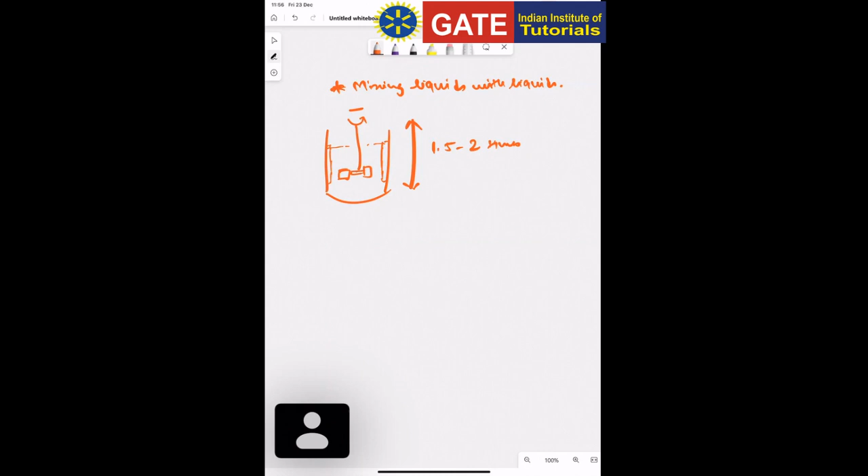In such equipment, the usual configuration you want is that the height of the vessel would be somewhere in the range of 1.5 to 2 times the diameter. So this is the diameter of the vessel, and the diameter of the impeller we are using is approximately 1/3 of the diameter of your vessel.

This agitator or impeller is usually driven by an electric motor. This vessel, depending on whether you are trying to do a batch or a continuous reaction, if it is a continuous one, will have a provision for an inlet and an outlet, and then a heating coil or jacket in case the stirring or mixing needs to be done at a certain elevated temperature.

We know that in most cases, when two materials are in contact with each other, they have a certain tendency of getting mixed. As you increase the temperature, the solubility or miscibility would increase. So in cases where you need a very concentrated solution, you will have to provide certain heating, which could be provided through a heating jacket around this vessel.

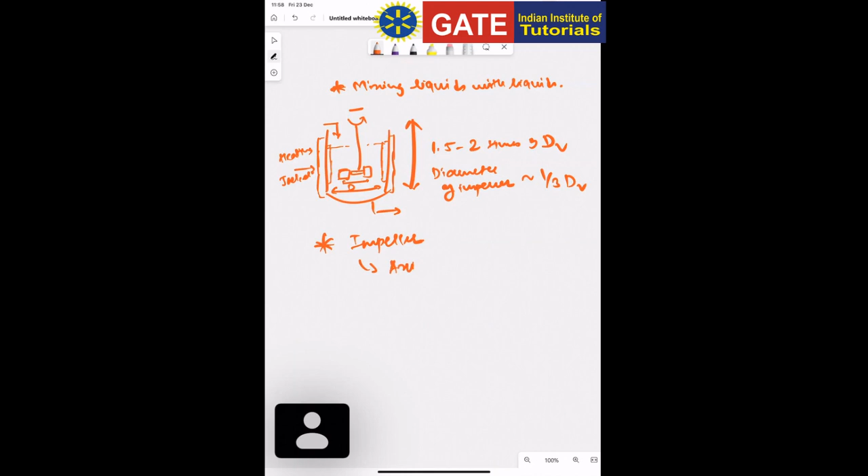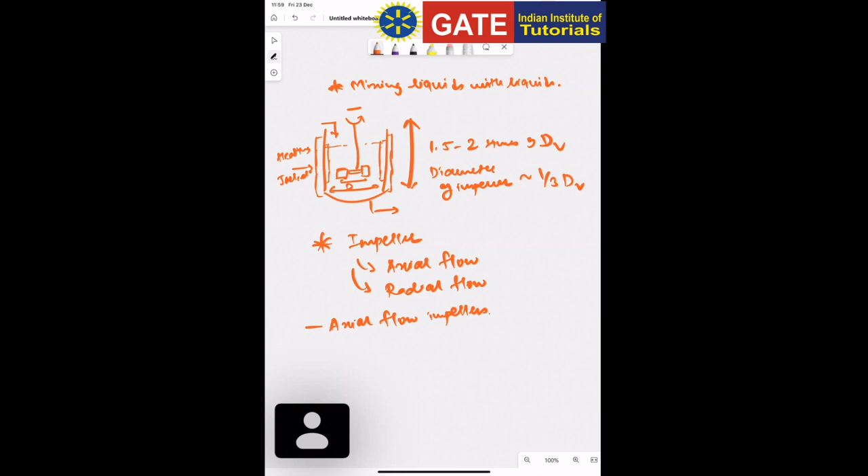One is your axial flow impellers, and the second one is your radial flow impeller. The basic difference between axial flow and radial flow impeller is that the axial flow impellers generate the flow currents or flow patterns which go parallel to the axis of the shaft.

So in axial flow impellers, the flow currents are parallel to the axis of shaft, and hence the name axial flow. And in radial flow, they generate flow currents in the tangential or radial directions.

When you have motion of liquid, let's say your shaft is moving in this direction, so your radial flow will be something like this. Because of the circular motion generated here, along with the tangential flow due to the circular motion induced by these impellers, these kinds of flow currents would be generated by your radial flow impellers.

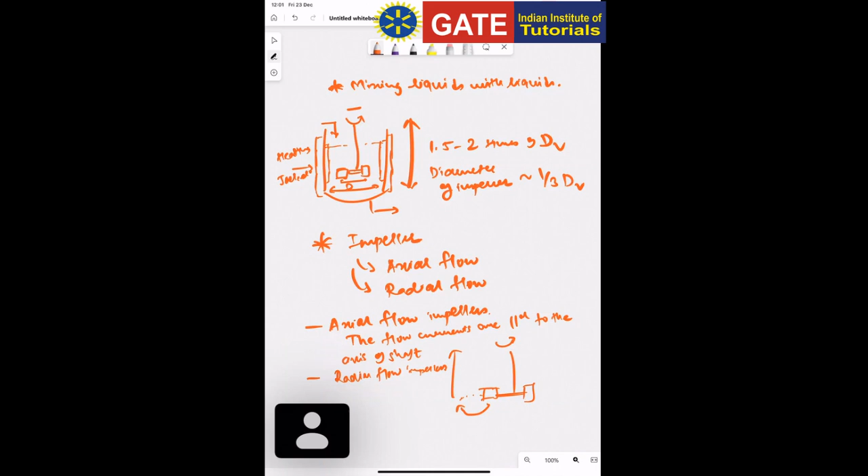Further, depending on the configuration of the blades or the impeller dimensions, you have more varieties based on which it can be classified, which includes propellers, second is paddles, and the third one is turbine. These three are based on nothing but the configuration or design of your impeller.

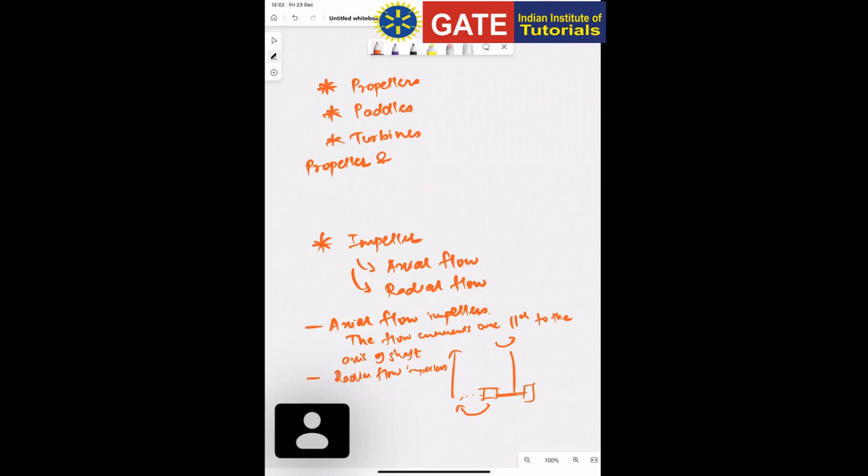The first two, axial flow and radial flow, are classified based on the flow currents or direction of flow currents generated by them. Based on the two different classification methods we discussed, your propeller and pitched blade turbines,

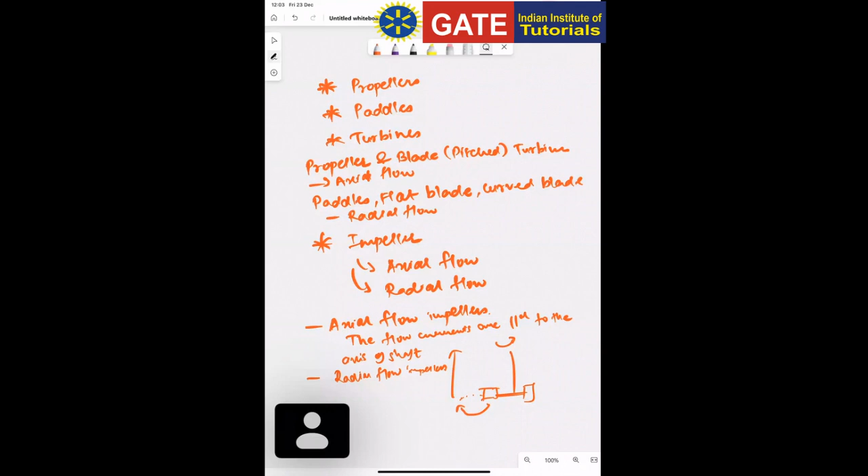they are axial flow impellers, whereas your paddles, flat blade and curved blade, these are your radial flow impellers. I've just mentioned the names here, I'll show you in general how they actually look like.

First let's see how the propeller is. The most common one, and the one you must have seen very often, is the three blade propeller. It's something like this - you have your three blade propeller, and this is the point where it is connected to the shaft.

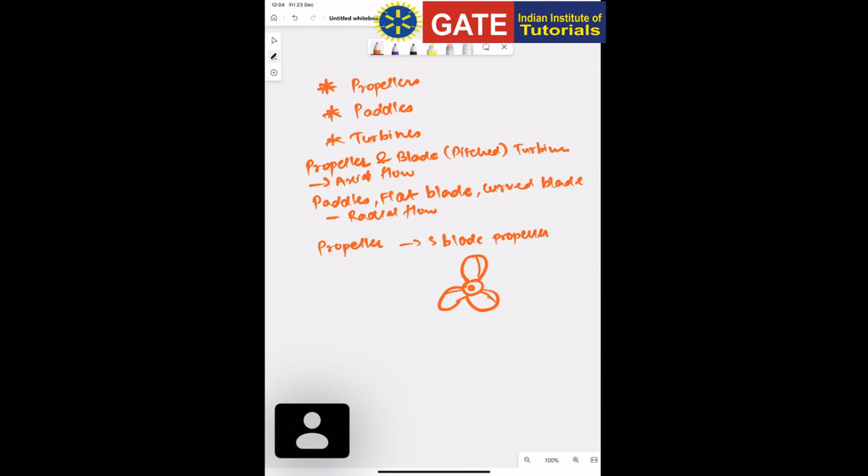Most of the time it is something we must have seen in any of our lab experiments where we have a batch reactor and you have to provide a very high speed stirring. So in those cases, these propellers are used. This is the three blade propeller, and these are typically the high speed ones.

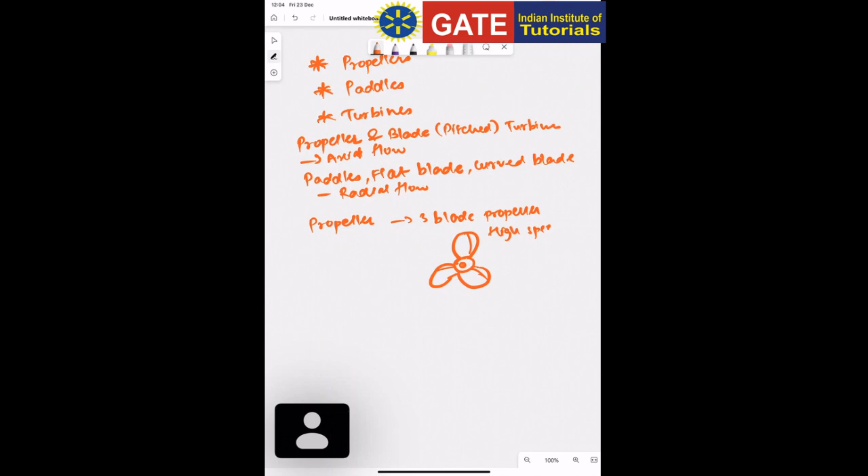In case where you have a very large vessel, it's possible to use such high speed propellers for mixing, and they would be sufficient enough to not cause any localized spots where you have only certain concentrations at one point and a different concentration at another. If you have a very large size, there are different ways in which you can use this propeller - one is the vertical alignment, and the other is the sideways alignment, where you can have your propeller aligned through one of the sides of the vessel.

This one is what we call the centrally mounted propeller. This one is your sidewall mounted. And then there is also the possibility that instead of having it perpendicular to the surface of the liquid, you can also align it in a different direction, something like this.

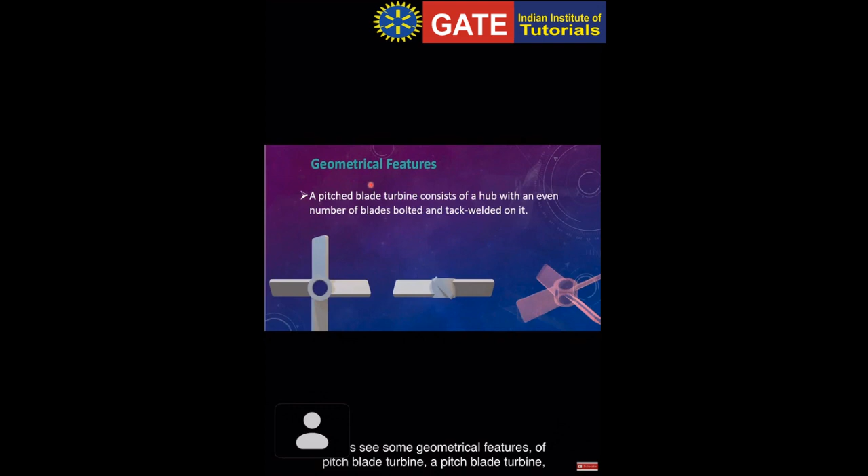That is how your pitch blade turbine looks like, and compared to the straight open blade and the vertical curved blade, it obviously has a slightly different configuration. So these are the types of turbines. Let's now look at the specifications of the ones which are generally used. The ones most commonly used among the turbines, as I mentioned, include the vertical curved blade and the open straight blade, and these are the ones which have more effect towards generating radial flow currents than axial flow.

So we were discussing about turbines, and the commonly used turbines are effective to develop radial currents.

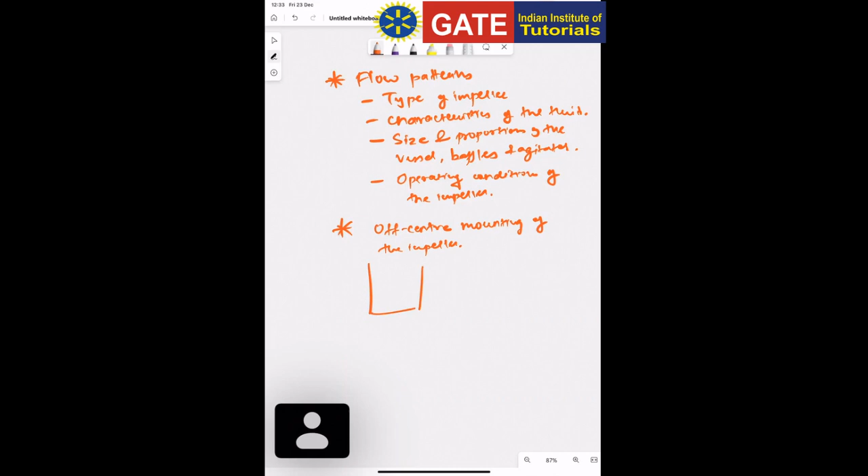Another way in which you can avoid formation of vortex, which we discussed briefly, is off-center mounting of the impeller. This off-center mounting is as opposed to something centrally mounted. Off-center is something where it is not exactly at the center of the geometry of the vessel, but somewhere on the sides, or at a certain angle, or on the sides of it.

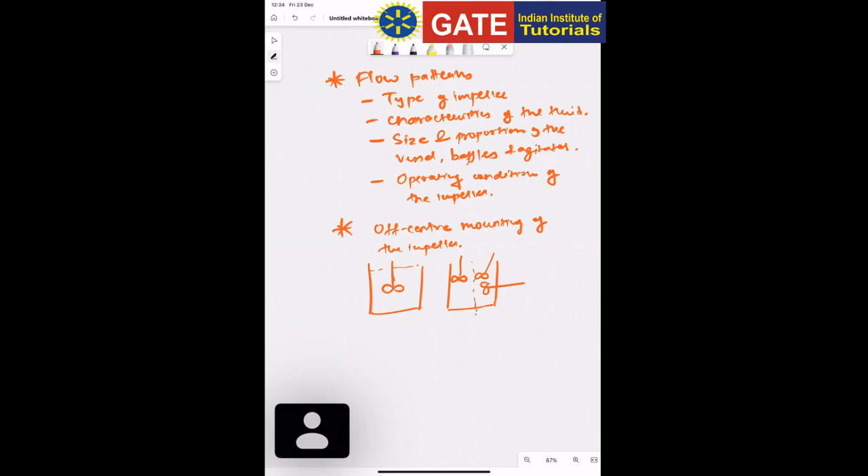In small vessels, different alignments or mounting of the impeller might be of much better use as compared to the large vessel. So the vertical alignment in smaller vessels, vertically mounted impellers are preferred, whereas for larger vessels, vertical as well as side entering propeller are feasible.

With side entering, I mean this, and vertically are like these two. So off-center or centrally mounted, as well as the off-center one, they can be used in smaller as well as larger vessels. Whereas if you want to use the side mounted impeller, those are efficient or practical only when you have a large vessel under consideration.

In case you are using larger vessels for mixing, and the design of your vessel compels you to use only the vertically mounted or vertically aligned agitator, in that case, to avoid formation of vortex, you can make use of the baffles as we discussed before.

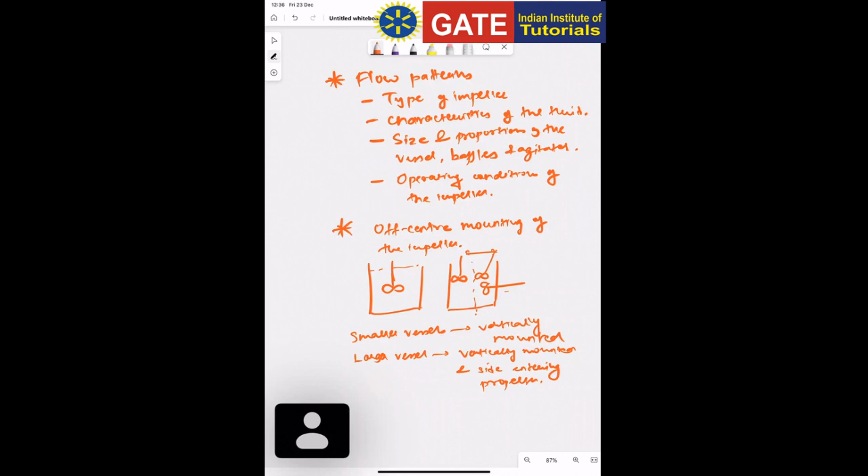After this, you have the third type of impeller, which is paddles. So in paddle agitators, what you usually have are the vertical agitators with 2 to 4 blades, and these agitators extend close to the wall. Because of the large nature of these paddles, the motion or current generated is mostly laminar regime flow.

The one which you must have seen often is the anchor type paddle, which looks like this. So this is a kind of your anchor type paddle.

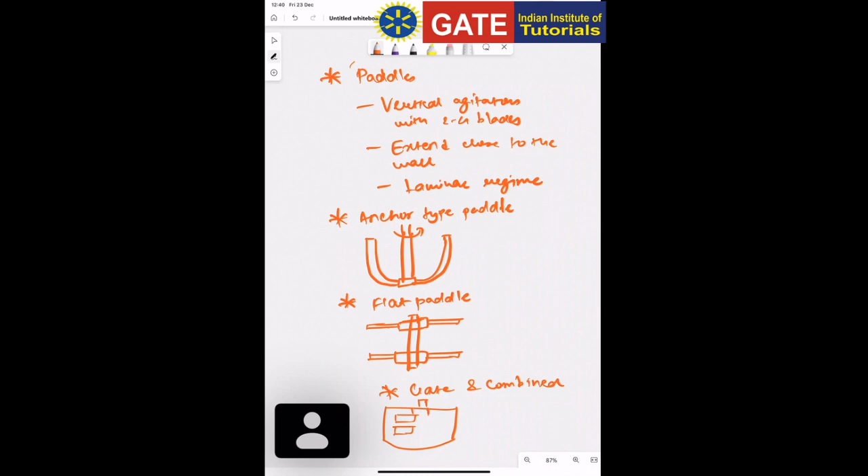And then you have another two types of paddle known as gate paddle and combined paddle. In both these types, what you have is something like this. Here it's not only these blades which move along, but also the periphery of it. Because of the movement of the blade along with the periphery of these paddles, they sweep the entire area to which they are exposed.

In case where you have a high concentration of solids present in the liquid, you make use of this gate and combined type of paddle, where the extended surface or periphery and these blades almost reach towards the wall of the vessel. There's a possibility that when you have a very high concentration of solids present, those might just get stuck to the walls of the vessel, and if you do not scrape it out, you would lose most of the solids stuck to the wall.

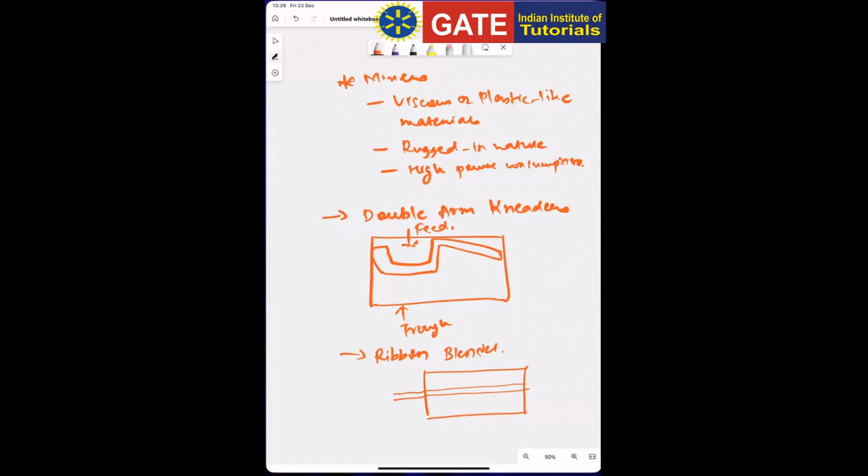Okay, sorry, I forgot to turn on the mic. Okay, I don't know where did I stop.

So again, as I was saying, as you had seen in the video, in the double arm kneader mixer, you can send in the feed through the open top, and then it gets mixed. When you think you have provided sufficient time, you can tilt this trough to get your material out, clean the blades, and then again start feeding for your next batch. So that is how your double arm kneader mixer works.

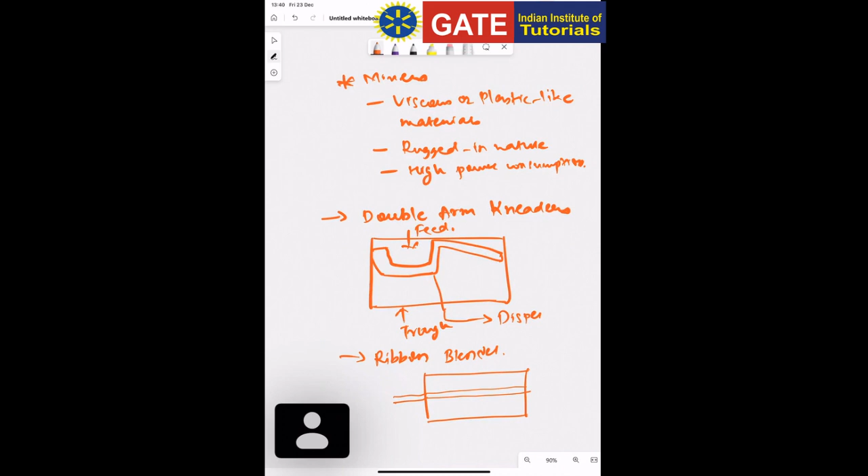The other modifications generally employed or possible in this kind of mixer involve using different kinds of blades. What we had seen was called the Sigma blade, whereas the other provisions are known as the dispersion blade, and the next one is the double naben blade. The first one we had seen, and the most commonly used, is the sigma blade.

This dispersion blade is mostly used in the rubber industries or for rubbery masses, whereas your double naben blade is used for heavy plastic materials. The sigma blade is used to knead and mix very sticky materials. Any plastic-like material operated at a slightly elevated temperature can use the sigma blade, whereas for more rubber-like material, it is better to use the dispersion blade.

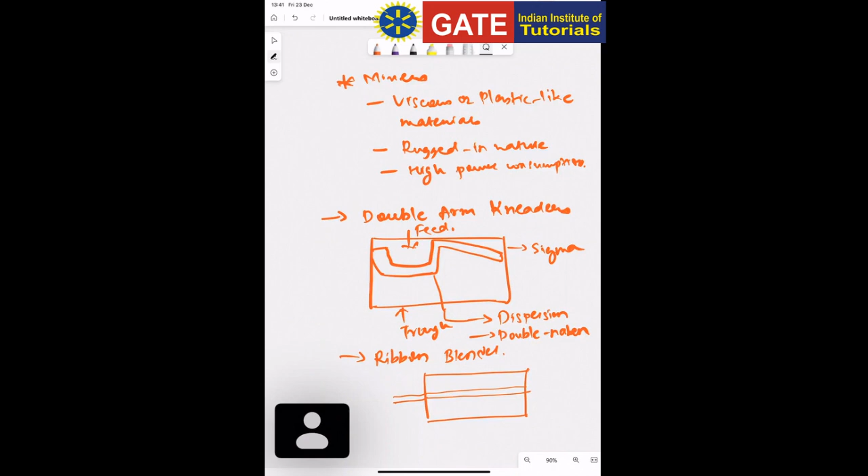So I'll just try to give you a slight idea of how these blades look like. Okay, so your sigma blade was something like this. This was your sigma blade. Again, in the two-dimensional figure it might not be very clear, so maybe you can refer to the images online.

Then you have your dispersion blade, which looks something like these. And then you have your double naben blade, which is kind of a double trough, or double elevation here.

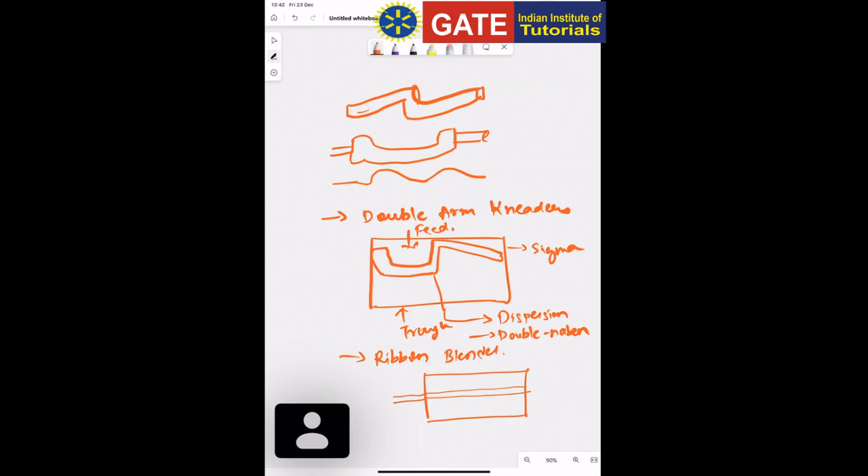So these portions, what you see here, these are the ones which hold the material together, and then they kind of push it onto the adjacent blade, and that is how you do the mixing. Because these are very heavy plastic materials, the double trough or the deformed portion of these blades are able to hold that material and give some amount of time, and then it is pushed onto the other blade so as to mix it properly.

Okay, so this one was your sigma blade, this one was your dispersion, and this was your double naben.

Then the next mixing equipment is your ribbon blenders. In ribbon blenders, it's slightly more easy. You have two helical ribbons moving in the opposite direction.

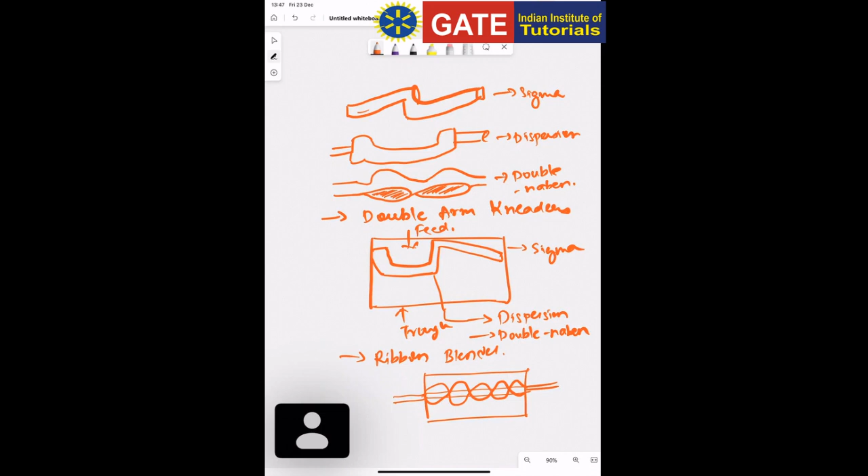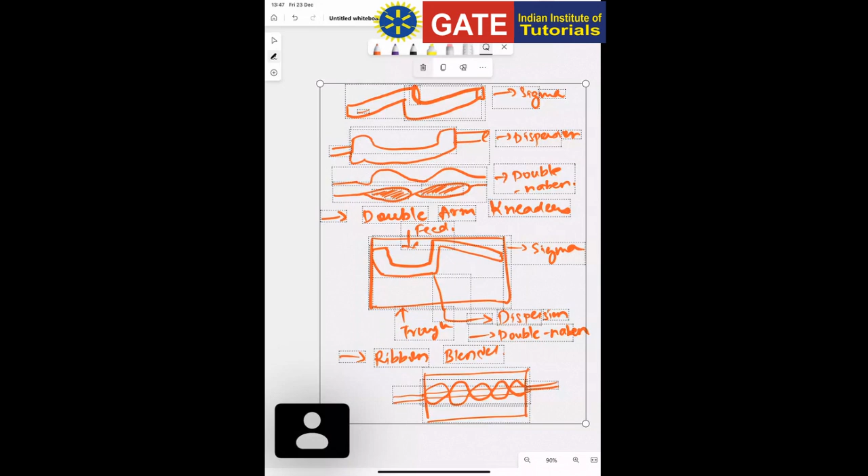So next what we have is a Banbury mixer. It is again a heavy duty mixer with two blades rotating in a cylindrical shell. But I think it would be better if I show you its working than just giving you a two-dimensional representation. So let me just...

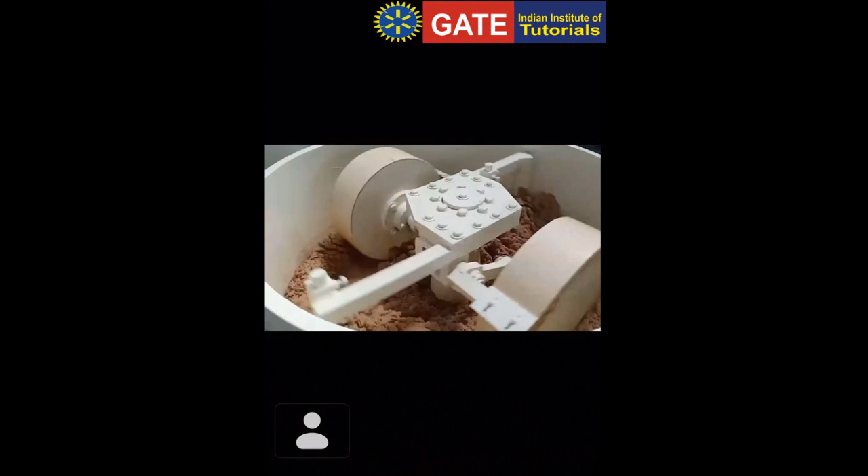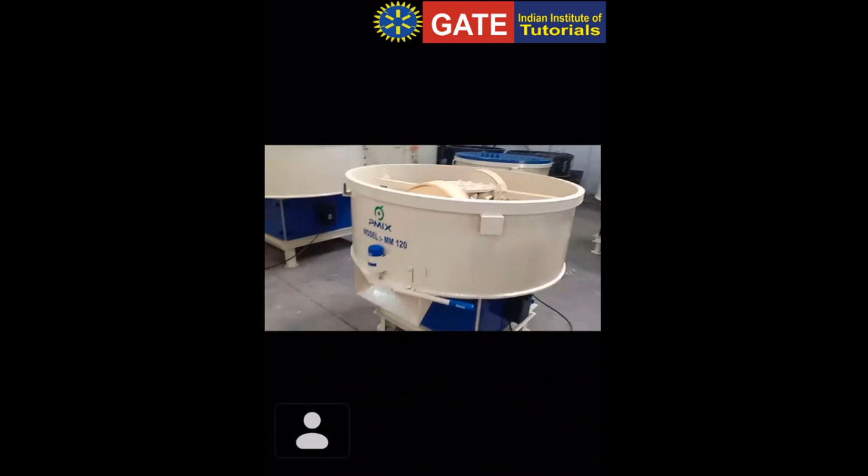So you can see these wheels are moving, and the ploughs you see are the ones directing the flow of solids into the wheels for crushing them and obtaining fine grains or very narrow solid sizes.

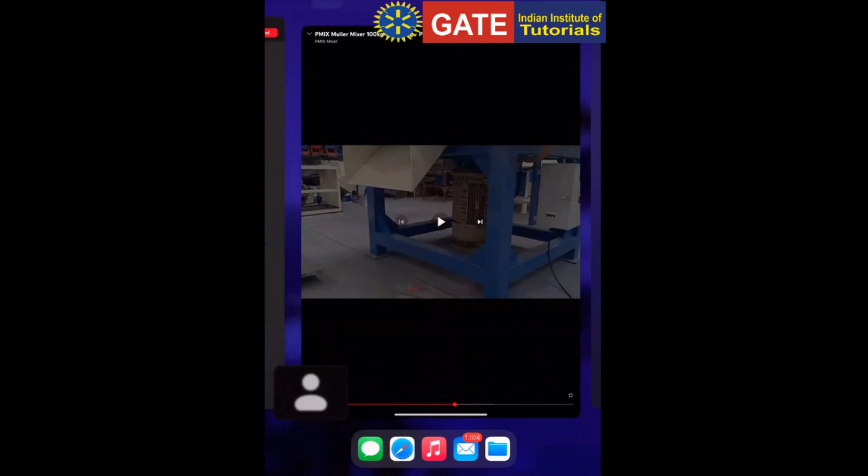Right. So I hope this video was able to give you a clear indication of what the Muller mixers are. Their overall operation is slightly different because they carry out basically two different types of operation at once: grinding and mixing. But they do have very significant applications in the industry because of their dual functionality.

Okay, and then the last one is the tumbler. Again, this is something you must have seen very often whenever there is roadside construction happening, especially places where cement is being used quite a lot. In those cases, you must have seen this tumbler, of which the most common is the double cone tumbler.

So what you have is this tumbler here, attached to a support. And then this tumbler moves, or it rotates on this axis, which is perpendicular to the line joining the point of the cones.

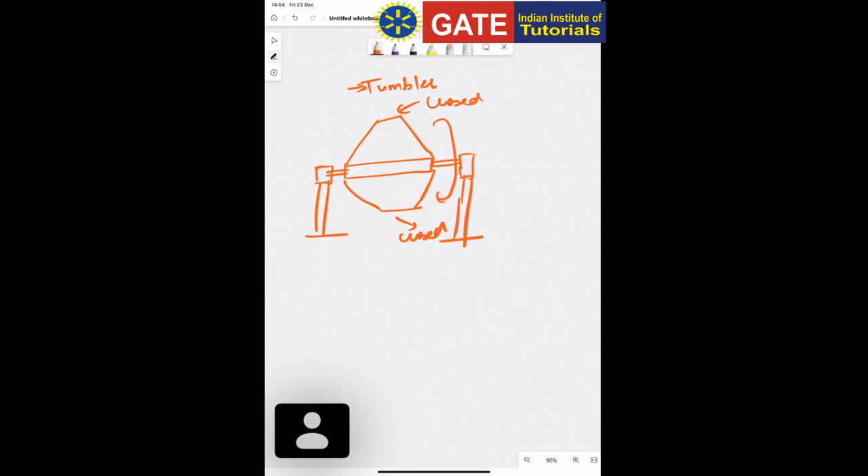So this double cone, this is what we call the double cone mixer. As I mentioned, it is mounted such that it can be rotated on the axis perpendicular to the line joining the point of the cones.

Even though you are given a total capacity of, let's say, around 100 liters, you do not try to fill it to its maximum capacity, or even to 70-80%. The maximum you would want to fill is such that you provide sufficient area and contact between the different materials within the feed. So for that purpose, you keep it to somewhere 50 to 60% of its capacity, filling the material up to that level.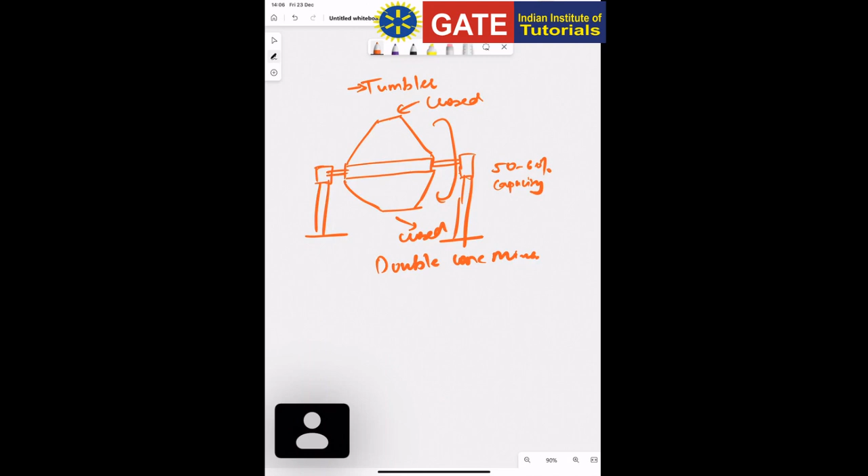So again, just like how the Muller mixer has two different functions being carried out at the same time, same is the principle for the tumblers, where you have size reduction as well as mixing of material taking place simultaneously. Is this clear, Shivam? Okay.

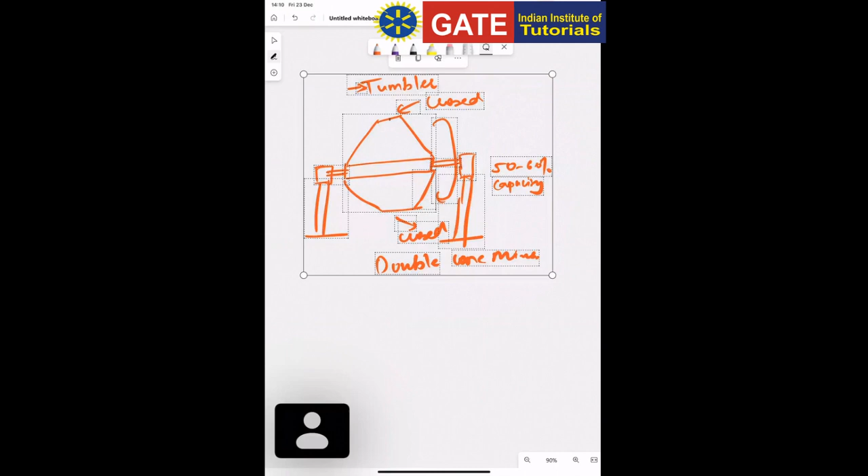One problem with this subject is that it involves very less understanding of the concepts, but more of memorizing the things. So it's going to be more like giving out the facts, understanding them a bit, and then remembering them - that's the only option we have in this subject. But still, we'll try to reason out the things mentioned for the different processes and in the different industries, right? So let's start with that.

In chemical technology, we will be dealing with four different types of industries. One is the polymer industry. Second is the petroleum industry, and within that, one is the point until which you obtain your crude oil - that's petroleum and refining. Then from there you have the petrochemical industry. And four is the product based industry, where you focus mainly on final products, like paper and pulp, soap and detergent, oil and fat industries, fertilizer industry, and so on.